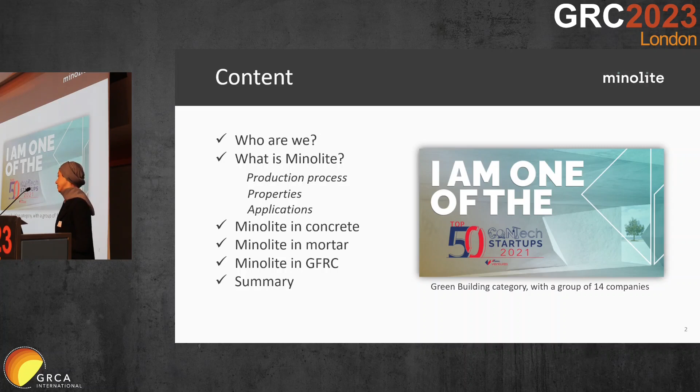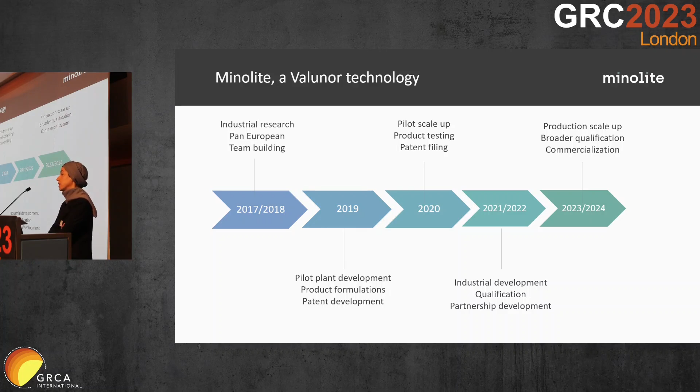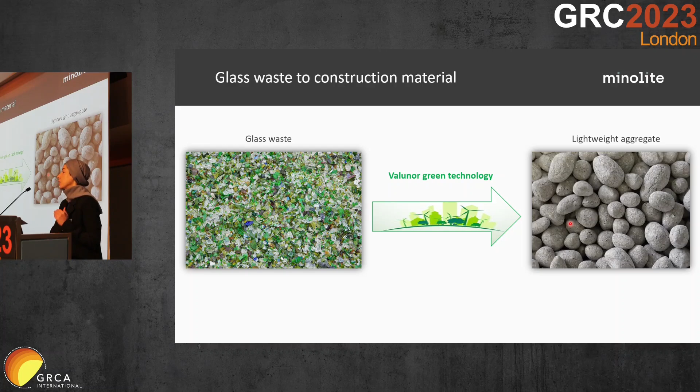So this is an overview of what we are doing. We are turning glass waste, which contributes to land toxicity, freshwater toxicity, and ocean acidification, into a very valuable lightweight aggregate, a very valuable product in the construction industry, through a patented technology, which is a non-CO2 emitting process.

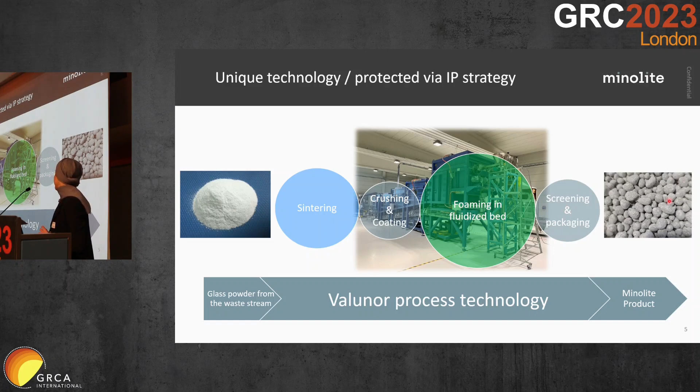What we are doing is that we are milling the glass waste to powder, and we are adding some additives, and then we are doing the sintering process, and after that crushing and coating, and then expansion or foaming in a fluidized bed. You can see a picture of our expansion kiln in the back. And then we will have screening of the final product and packaging. And you can see the final product here.

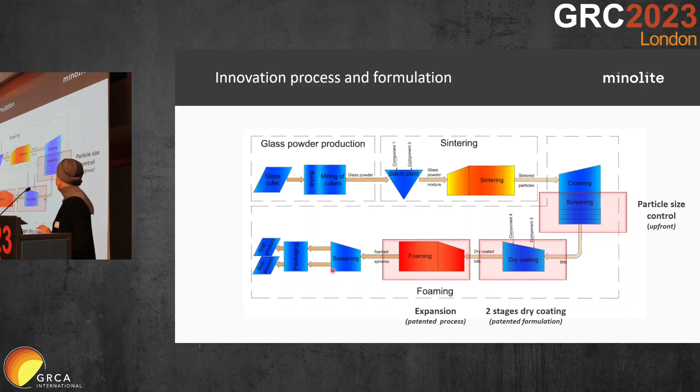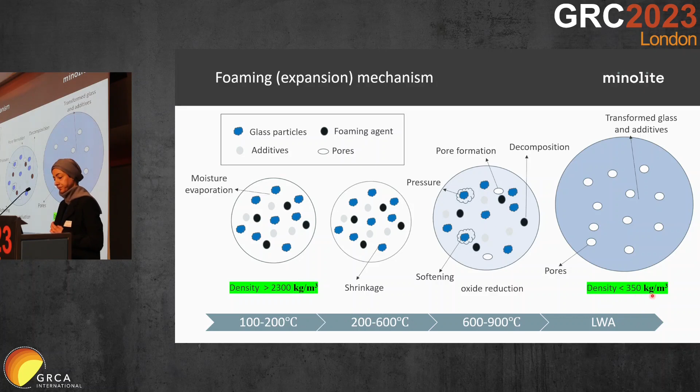If you look at the density, the starting density is 2,300 kilograms per cubic meter, while the end product density is less than 350 kilograms per cubic meter. Our technology and our product is aligned with at least 5 of the UN goals. We are using glass waste and it is also 100% mineral based. There are no polymeric additives, and this is a completely CO2 free process, because the high temperature furnaces that we are using run on electricity, and it's renewable energy.

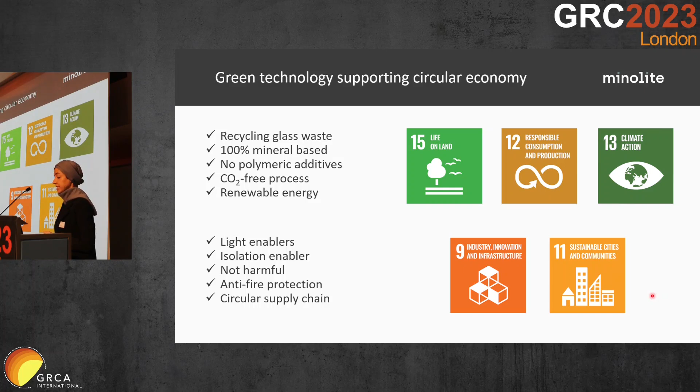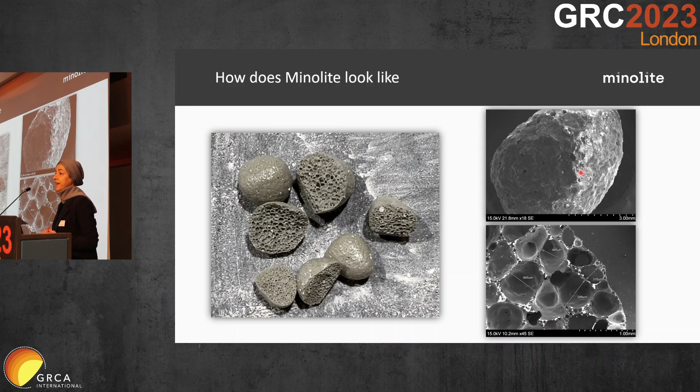The texture of the aggregates influences the adhesion between aggregates and cementitious material. So the rough texture shows better adhesion properties. You can see that these small pores on the surface have another advantage. The hydration product and the cementitious material can penetrate into these small pores and act as multiple hooks, binding the aggregates and cement paste phase.

These are some key properties of Minolite. If you look at the bulk density of different fraction sizes, for example, for 0.5 to 1, the bulk density is 320 kilograms per cubic meter, and as the particles get larger, the density decreases. And if you look at the crushing resistance, it is a very interesting result, because we expect that when the size of particles increases, the crushing resistance decreases, but it's the opposite in Minolite. We believe that this is because of the special formulation of the coating of the particles.

And the other thing is the water absorption. Water absorption is very low. This is unexpected in a porous structure, because porous structure is responsible for high water absorption, and high water absorption is not desirable for superior quality concrete. But Minolite has a special coating that not only seals the pores on the surface, but also keeps the low density.

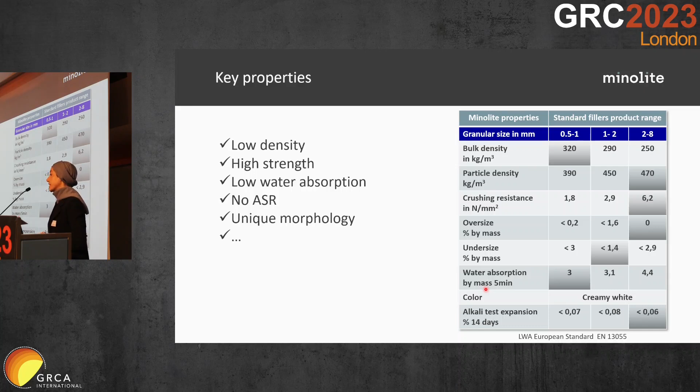And I'm sure you're wondering, because we are using glass waste, maybe you're worried about ASR, but we have tested that. And because of some additives that we add to the mixture at the beginning, we haven't observed ASR. This is the crushing resistance versus bulk density, a comparison between Minolite and two different products offered in the market. So you can see expanded clay here. Minolite has lower density and higher compressive strength. And if you compare with another type of expanded glass, you can see that Minolite has higher strength.

The low density of Minolite allows us to design lightweight concrete with low desired density. And the other thing is that because Minolite has low density, the thermal conductivity is very low, because you know that density has an exponential relationship with thermal conductivity.

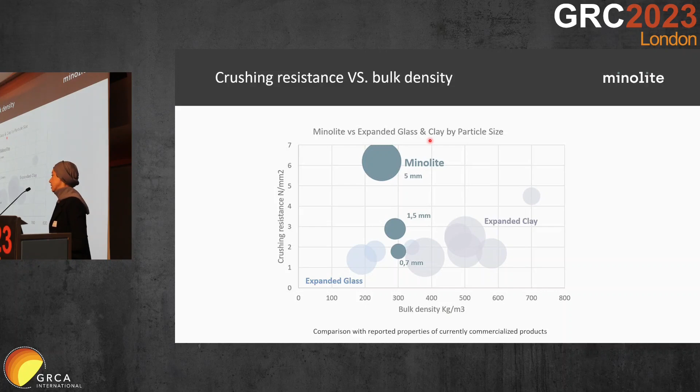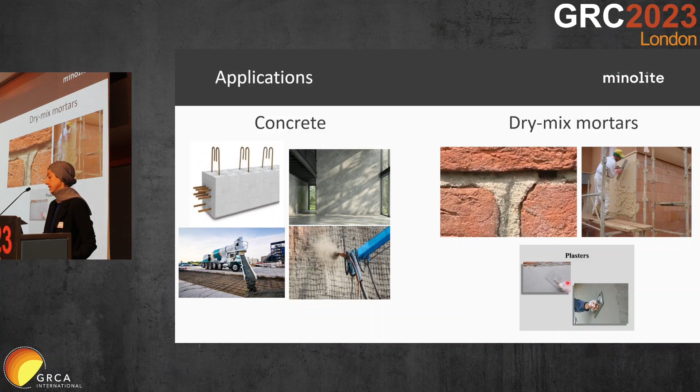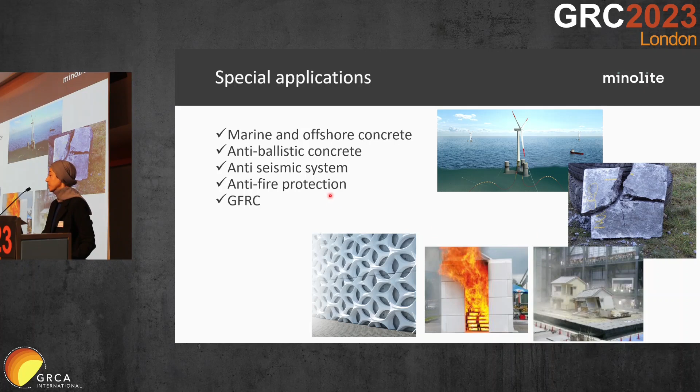So these are some applications of Minolite: concrete, precast and ready mix, and also dry mix mortars and plasters, and also some special applications. For example, marine and offshore concrete, anti-ballistic concrete, anti-seismic systems, anti-fire protection, and last but not least GFRC.

Here are some of the results that I would like to show you. The compressive strength versus curing days. So Minolite was used in concrete, and gravel in concrete was replaced by Minolite partially. And you can see the green columns are Minolite, and the gray one is the reference without Minolite, the normal one. So you can see that, as we expected, the compressive strength is a bit lower, not very significant.

For example, you can see after 28 days of curing, we have 36.7 megapascal, while the normal one has 44.3 megapascal. But if you look at the density, you can see that the density of Minolite is significantly lower. And if you look at the thermal conductivity, you can see that thermal conductivity for Minolite is 0.75, while for the normal concrete is 1.46.

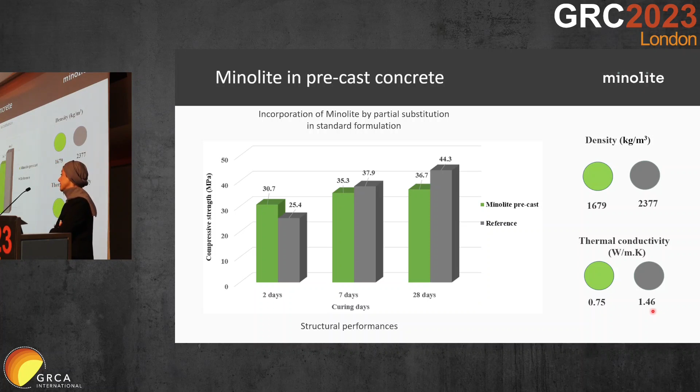And we have also results for mortar when Minolite is incorporated in it. So sand was replaced by Minolite partially, and also we compared it with a competitor. The replacement was exactly the same. And you can see that compared to our competitor, the compressive strength of the mortar is higher. And if you look at the density and thermal conductivity, you can see that they are very similar.

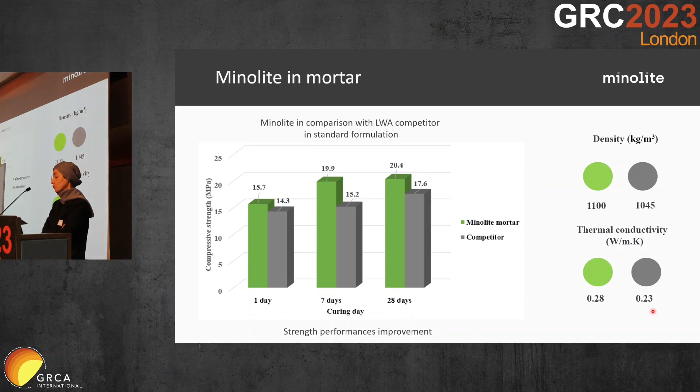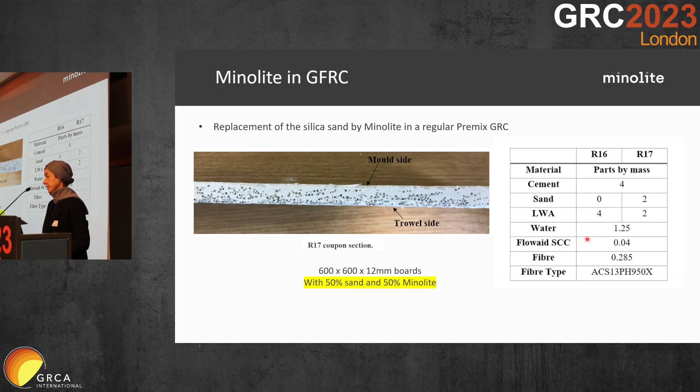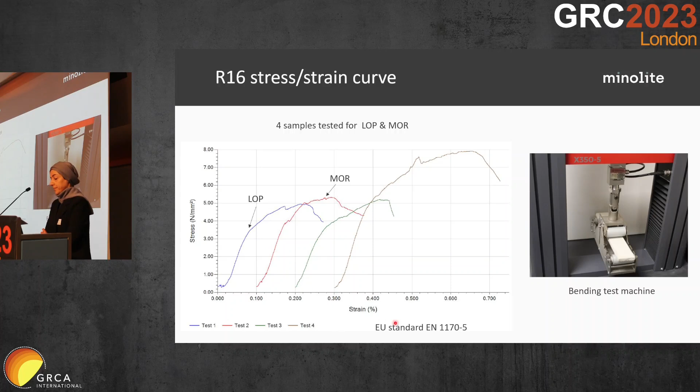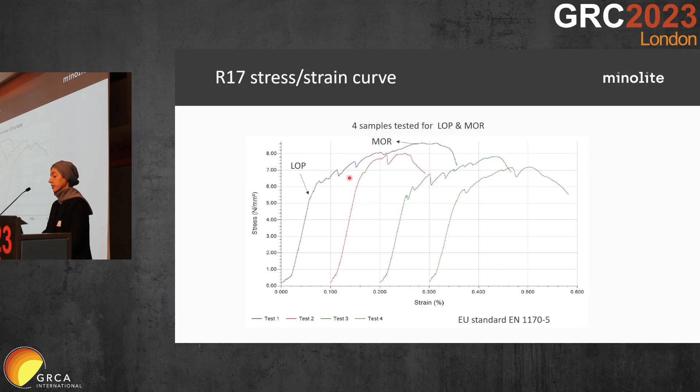So we have done the bending test machine, or external labs did that, and we have done 4 different tests for one sample. And you can see the R16 stress strain curve here, following the standard EN 1170. And this is for R17, which 50% Minolite was used. And you can see the higher MOR and LOP. And this is the comparison between them.

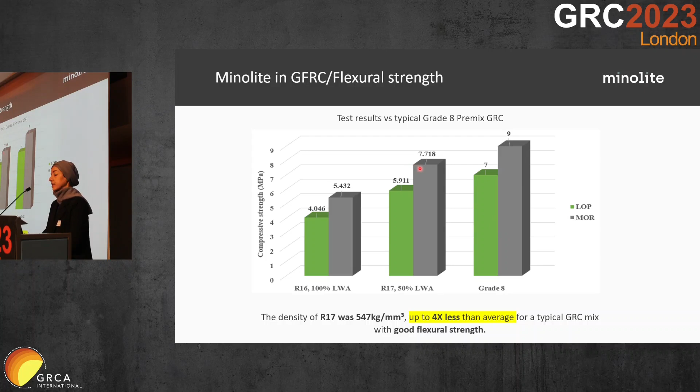So the last one is the typical GRC mix. And this one is when 50% Minolite was used. So you see that, of course, the flexural strength is a bit lower, but when you're using R16, the flexural strength is even lower, but we should consider that the density of this one, R17, is 4 times less than the density of the typical GRC mix, which is very significant. But the compressive strength is lower, but not very significant.

We have also done some tests on thermal conductivity. So we have produced 2 panel boards, or external lab has done it, 2 panel boards with partial replacement of Minolite, and then following standard EN 12664 and the guarded hot plate test. You see, these 2 are when we have used Minolite and with different particle sizes. And the thermal conductivity is very low, if you compare with the conventional concrete, which the thermal conductivity is 1.6. So thermal conductivity has a significant difference.

I don't have the information for the typical GFRC mix, but I saw in the literature that the density and the thermal conductivity is even higher than the conventional concrete. So density for these 2 that Minolite was used is around 800 kilogram per cubic meter.

I also have this block that we have used Minolite in, and we have measured the thermal conductivity. We have put this in the stand for thermal spray. What? Sorry, power spray. I forgot the name. Power spray. And if you would like to look at it, you can just,

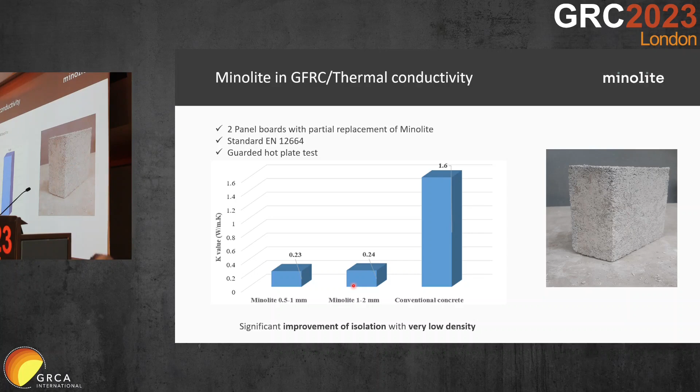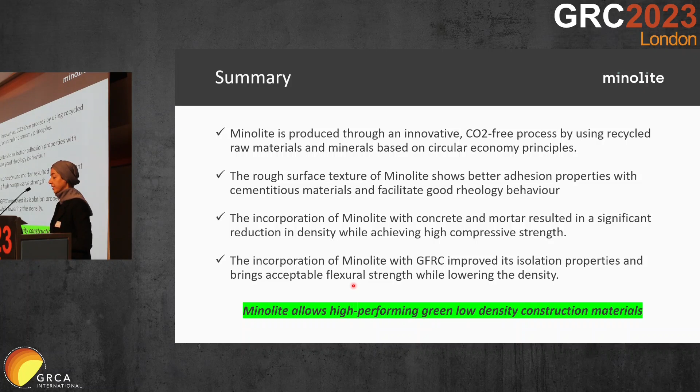Yes, to wrap up, Minolite is produced through an innovative and CO2-free process by using recycled raw materials and minerals. The rough surface texture of Minolite shows better adhesion properties with cementitious material and facilitates good rheology behavior. The incorporation of Minolite with concrete and mortar resulted in a significant reduction in density while achieving high compressive strength, and the incorporation of Minolite with GFRC improved its insulation properties and brings acceptable flexural strength while lowering the density. And Minolite allows high-performing green, low-density construction material.